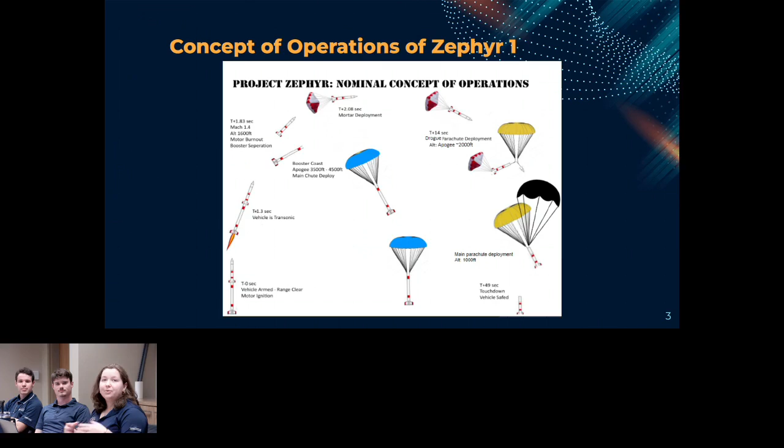But unfortunately, when we launched it, that's not how it went at first. As you know, things can go wrong sometimes in rockets, no matter how much we prepare. We did launch our rocket, and we got the booster back, and we got the experimental parachute back, but unfortunately, we lost the dart in the jungle of Florida. If you want to go to the next slide. We have a couple of views of the launches here that we want to show you guys.

We launched this single stage boosted dart configuration on an M3700 motor. Its top speed was about Mach 1.4, and then the parachute deployed at Mach 1.38, so it slowed down fairly quickly. We did not get the dart back, like I said, but the parachute detached throughout flight, so it did experience the forces. We just didn't get the dart stage back, which is what we're trying to improve upon on this next rocket.

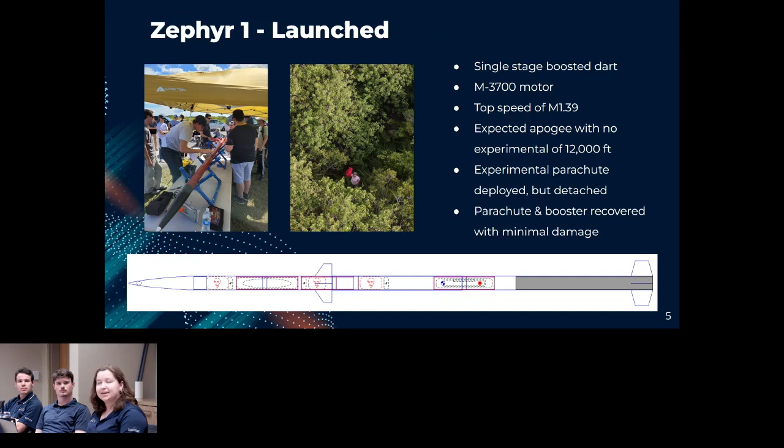And so we have Zephyr 2. Zephyr 1 was our first iteration. Zephyr 2 is our new launch vehicle that is more improved, more modular, more cost-effective for our testing reasons. So here's a rocket overview. There are 3 different parts to this rocket, 3 separate sections.

Going from the bottom to top, we have our first stage booster, which houses our largest motor and avionics and its own recovery system. Then the second stage booster, which has our secondary motor and avionics system and recovery system for itself. And then our dart stage, which has our data acquisition, additional flight computers that we need, and avionics bays, as well as the experimental parachute and the main and drogue chutes.

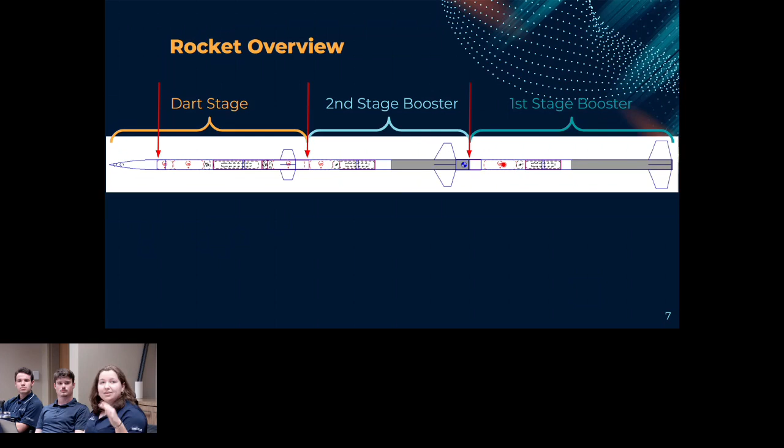So we'll kind of go through that. The dart stage, next. I kind of labeled it here a little bit. We're going to have 2 separate avionics bays in the dart stage. As you can see, there's going to be one in the nose cone. That was recently added because we're going to try live streaming video footage and data back to us by the launch field. And then we're going to have our drogue and main chutes. And we're going to have the dart avionics bay, which has our load cell in it, to make sure that we're measuring the load from the experimental parachute.

Our connection point, which our structural team will go more into detail on, basically anything to help with stage separation, so our black powder charges, and those are those red arrows right there, our separation points, and then we have the experimental chute in the back that has 2 cameras attached to it as well. Our second stage booster has its main chute and then the avionics bay that includes separation and ignition of the second stage motor.

And then we have what's called an exterior coupler for us. Since we are a minimum diameter rocket, it's a little bit difficult to stage our engines. So instead of having the extra frontal area drag, we are having the skinny rocket and then just having one external coupler to hold the top stage onto the second stage while it's being boosted. And manufacturing can go more into that in a little bit. And then our last stage is the first stage. There's just the main chute and the avionics bay, again, for separation and deployment of the parachute.

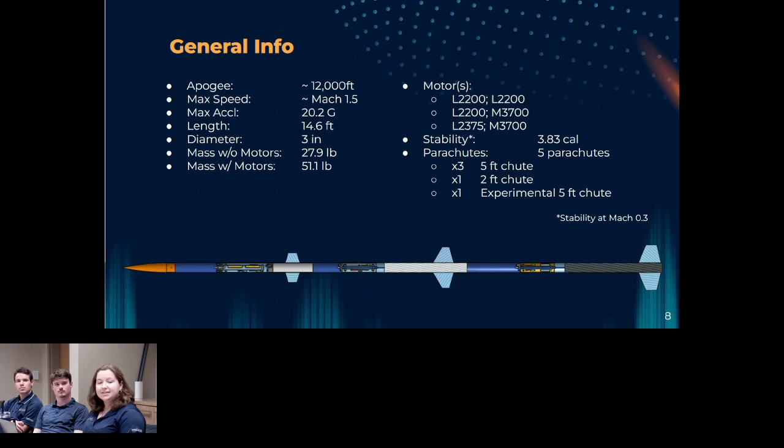So here's the concept of operations. You can just click through it a little bit. We have our launch in the beginning, and then we have our first stage separation from our first booster to our second booster, and then that first booster is going to recover, so parachute deployment. And then we have a second stage separation, which is about 4 or 5 seconds into the flight, so pretty quickly. We're getting supersonic pretty quickly. And that's the stage separation between the second booster and the dart stage.

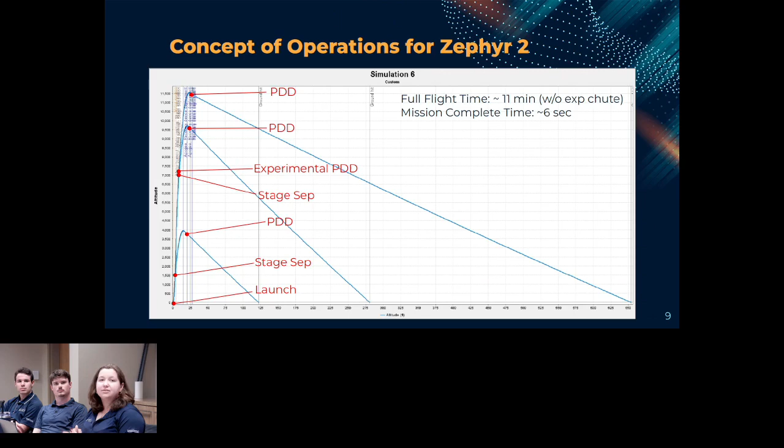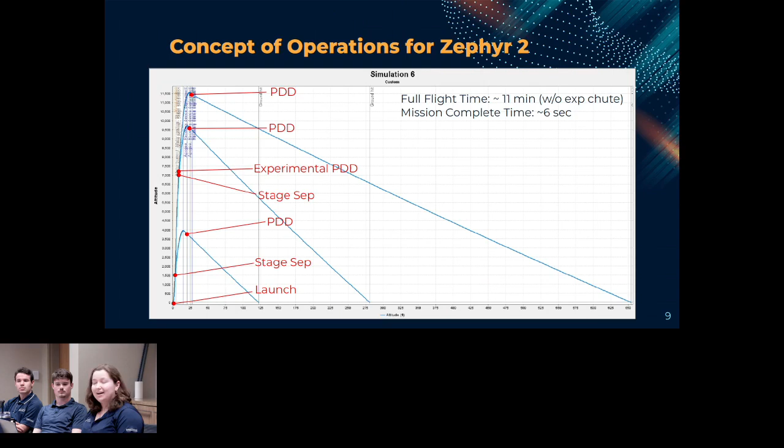And then the dart is going to deploy the experimental parachute, not even a full second after stage separation, just to make sure that the booster gets out of the way before we eject the parachute at the bottom. And then the second stage is going to deploy its parachutes and come down nicely. And then after apogee, if the experimental parachute does not work in any shape or form, then at an apogee of about 12,000 feet, the dart stage will deploy a drogue chute. So the full flight time with landing is about 11 minutes, but the whole mission is completed in about 6 seconds. So that's a pretty quick time frame that we have to deal with, especially avionics wise.

And so here are the recovery systems.

I know it's me talking a lot. I apologize. They'll get to talking soon.

We're gonna go into a large stairwell in our college, and we're gonna start dropping them, measuring the descent rates, which one works the best subsonically, and then we'll use that data to interpret what we're going to use for our supersonic test flight, and then we can add on to those as we get further.

So just a quick summary of the aerodynamic team's goals have been to obtain the trajectory versus time of our rocket, as well as the stability. We also want to make sure that our rocket doesn't exceed the altitude limit at our launch site. It's also very important. Previously, we would use OpenRocket for our whole simulation, but OpenRocket's accuracy begins to suffer in the transonic and supersonic regions.

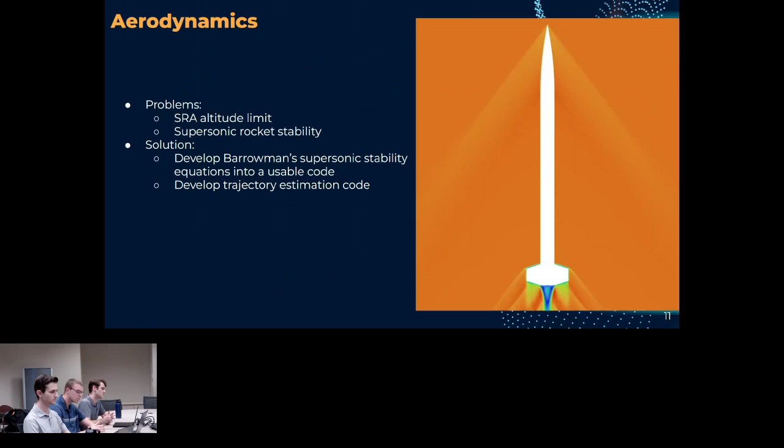So we are trying to develop our own codes for our own purposes to obtain these quantities. So we're developing Barrowman's supersonic stability equations from his paper into a usable code, and we're also developing a trajectory estimation code. So just a quick overview of the trajectory estimation code. So it's based off of the rocket equation. It's a statement of Newton's second law, right? It sums the forces on the rocket.

The code determines the velocity contributions from each force. So obviously thrust is a positive contribution, gravity is a negative, and drag is also a negative. In this case, we're assuming zero angle of attack, so there's no lift. But through each iteration, it builds off the last, and eventually what you get is a smooth curve of velocity. And you can integrate velocity to get your altitude, and you can take the derivative to get your acceleration. And in the end, we get a very good approximation of velocity, position, and acceleration versus time.

There are some drawbacks. We're relying on previously existing data. We're using engine thrust and engine mass flow rate data from the manufacturer, which is tabulated, so it's not exact, it's just an approximation. We're also using the ISA atmosphere model, which is accurate within our flight envelope. Additionally, we have to determine drag on our rocket.

And this is a difficult value because typically this would be determined experimentally with wind tunnel tests. But we don't have the funds for that, so we are looking into other methods, such as empirical methods from many years of missile tests and missile experimental tests in wind tunnels. And we're also looking into doing some CFD simulations to determine the drag.

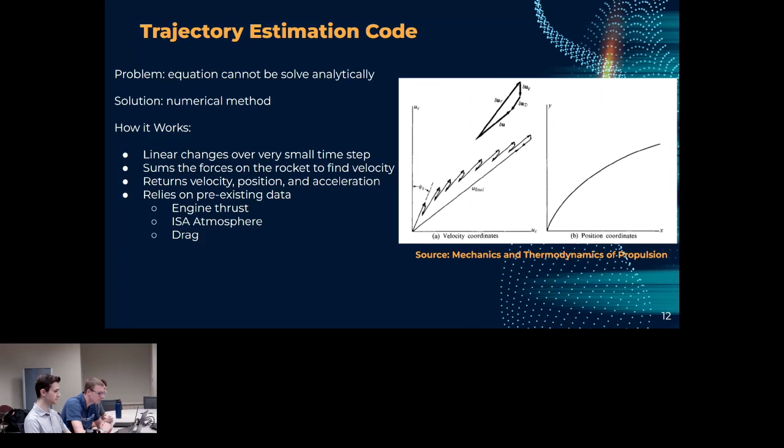So as Eric stated, we need the drag coefficient values for our trajectory code. So that's what this whole section is about. We need it for the trajectory. And also we're trying to get these coefficient of drag values to match up between different models that we use. So when we start going into CFD, if we get coefficient of drag values outputted from CFD, we want to check it with something else. So the more we check, the more we can trust that value.

So the model that we use is based off of AIAA's education series, Missile Design and System Engineering by Fleeman. And in that model, there were a few assumptions. The first of which is that there is no boat tail, and the boat tail is placed at the end of the rocket, which reduces the pressure drag, and it basically controls the wake, minimizes the wake effects on the drag. And in this model, it's called the base drag.

Another assumption is that there was a gradual change in the speed of sound and viscosity in the altitude that we're going to be dealing with. That's true. And then also it assumes that there's a turbulent boundary layer, and because we're going at Mach speeds, we will definitely be having a turbulent boundary layer.

So the coefficient of drag model does have some limitations. The first of which is that it assumes a linear aerodynamic model. What this means is it essentially adds up the coefficient of drag for the various rocket components. So for example, it computes the coefficient of drag for the body, and then it computes the coefficient of drag for the sets of fins, and it simply adds up those values to get the total drag.

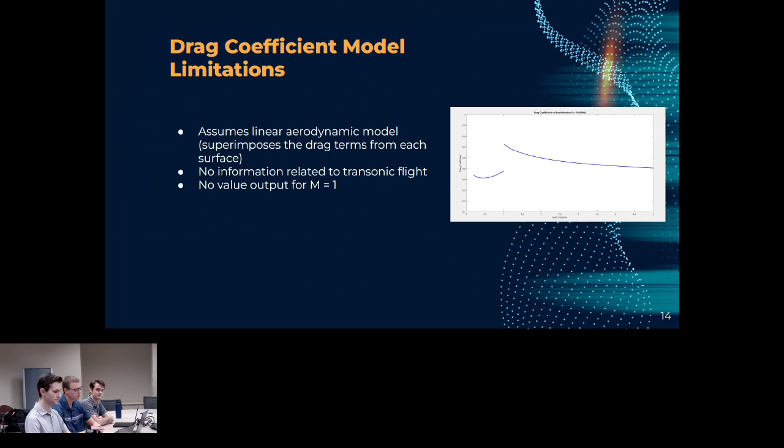So what this means is that it won't account for the fin interferences between the different sets of fins. And for our rocket, we have multiple sets of fins, so that might be something to keep in mind as we move along in our analysis. Also, there's no information directly related to the transonic flight regime, and there's also no output for Mach equals 1, which when you look at this figure to the right, you see a discontinuity, which is expected for this model. Next slide.

If it doesn't work, then we'll go back and look at the specifics of our code, make sure the assumptions are correct, or maybe add some more details if some of the assumptions cannot be made. And then we'll keep checking and keep checking until it works. When it does match, we'll then start applying it to our Zephyr 2 rocket. And then from that point, we'll be able to check the requirements such as altitude to make sure that we meet those requirements.

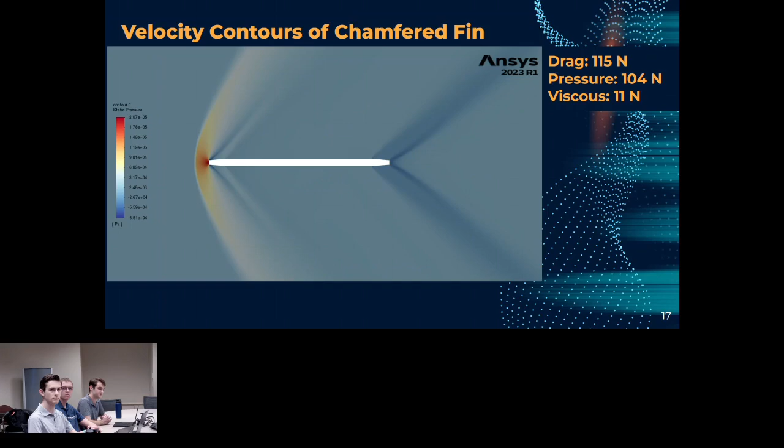Yeah, so what you see here is the first CFD simulation that we performed that we actually used to influence the design of the rocket. So right here is a static pressure contour plot of a simulation of one of the fins from the dart stage. This is the chamfered configuration, and this was run at Mach 1.4. The purpose of this simulation was to compare the drag result from a chamfered fin versus an unchamfered fin, because chamfering fins, especially composite fins, can be quite difficult to get a consistent angle. So we wanted to make sure that if we were going to put in the effort to do that, we'd get a significant result. So as you can see here, this fin produced a total drag, including pressure and skin friction, of 115 newtons.

Next slide. Immediately, you should be able to see the change in the flow structure because we're using the same contour colors. You can see the bow shock at the front moved away from the fin, and it's also at a steeper angle. It indicates the flow is having to slow down faster, and there's a higher pressure at the front. And as you can see on the right side, the drag is about 50% more, which is quite significant. So I bet you can expect which fin configuration we used.

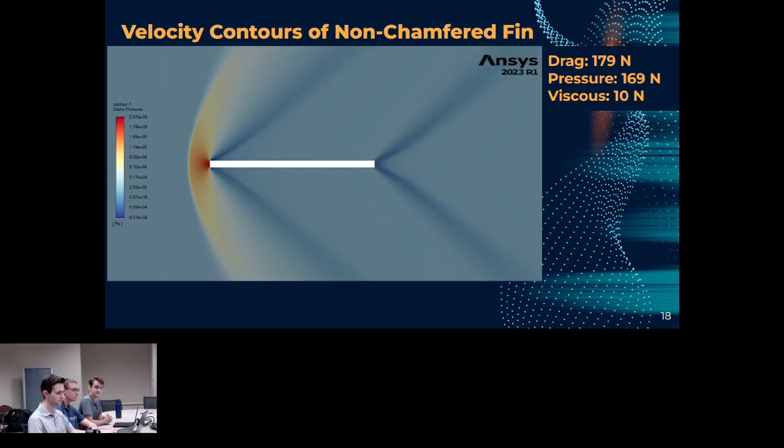Those simulations are not validated yet. We don't exactly know how to do that, but we're learning. That's one of the main goals of the CFD team, is to learn how to use CFD correctly as an aerodynamic analysis tool. We want to make sure that we validate our simulation methods. We want to make sure we're able to verify our results. And we also, in the future, want to be able to determine the error, so we can figure out possibly when we plot our trajectory what the upper and lower bounds of our maximum height, velocity, and acceleration might be.

Once we figured out how to verify and validate our solutions, some of the goals which we would like to accomplish are validating the empirical model, which Spencer talked about, validating the center of pressure data, which Graham will talk about for the stability calculations, and to fill in the data in the transonic region where the empirical model doesn't

provide any results. Currently, the software that we're using for our preprocessor, you can think of that as kind of like CAD, but for CFD. You build a computational domain, which allows you to simulate the flow around the body. The software that we're using for that is ANSA by Beta CAE Systems, our sponsor, and Fluent's preprocessor, as well as Pointwise. We have a bunch of different people on the team with a bunch of different skill sets. Some people prefer some softwares over others.

For our solver, we're using SU2. It's an open source CFD solver, and we're also using ANSYS Fluent. For our post processor, we'll be using Meta, again, by Beta CAE Systems. And lastly, we're still trying to figure out how we're going to run these simulations. The 2 fin simulations I showed you were run on my laptop. It got very hot. There weren't that many cells. It was only about 40,000 to 80,000 cells, which is not a lot. There was a simulation that I ran over the summer on a supercomputer that had about 4 million cells, and that took about an hour still.

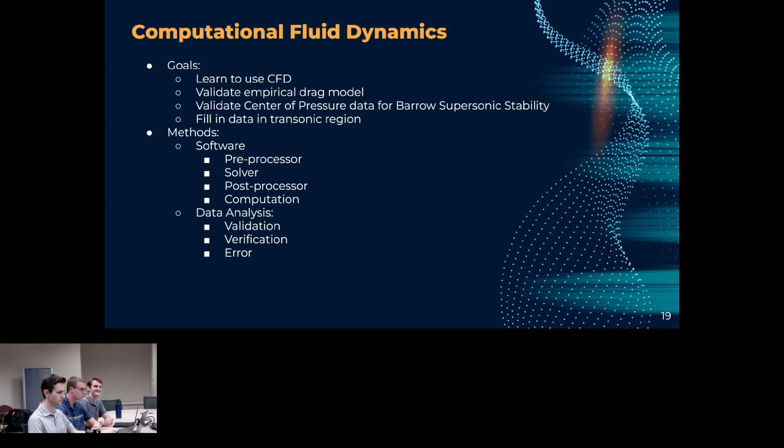So this is the future vision for the aerodynamics team. We want to make sure that we have all the aerodynamic parameters, such as the drag coefficient and normal coefficient. And we also want to establish a credible trajectory code, and how we were going to do that was referenced a few slides back, which was that iterative evaluation. We keep checking it and rechecking it, and then that loop. And we'll keep revisiting these points as we do flight tests and get flight data and check out the flight data.

And for the farther along goals, we want to optimize the Zephyr 2 geometry where we can, like changing the nose cone geometry, or adding boat tails, or doing some adjustments to the fins. And also we want to look into two-way FSI for parachute behavior, that being the fluid structure interaction. And this will give us more accurate CFD results, because instead of a static mesh, we'll start taking into consideration the dynamic effects that mesh has.

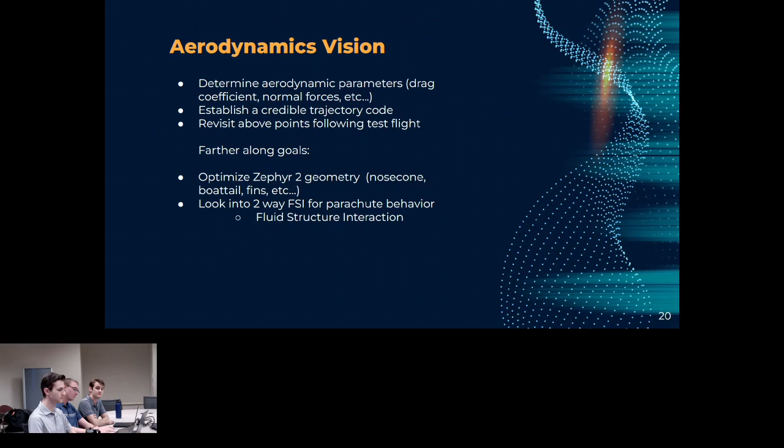So, supersonic stability. This has been a year-long attempt at recreating James Barrowman's supersonic code from his thesis paper back in the 60s. We have successfully been able to validate the results with what he got in his paper for a tomahawk fin. The only caveat now being that for calculating things for the entire rocket, it uses subsonic calculations for the nose cone and interference factors, simply for the sake of ease. And we will be adding those in later on, hopefully sometime this week.

And as you can see on the bottom there, I have up the stability for the full rocket as a function of Mach number, and as a function of Mach number and angle of attack. And as you can see, we very, very briefly are going to become unstable, but in terms of the actual rocket's flight, that will be a very brief period, if there at all.

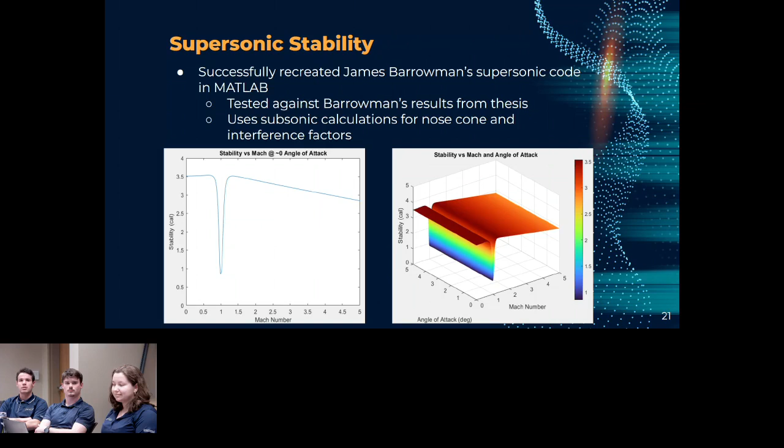And here are just some more graphs showing what it would be like for different stages of the rockets together. We have the full rocket, which was on the previous slide, and then with the sustainer stage and just the second booster, and then the sustainer only. And as you can see, that little dip is the only time that our rocket will ever be unstable.

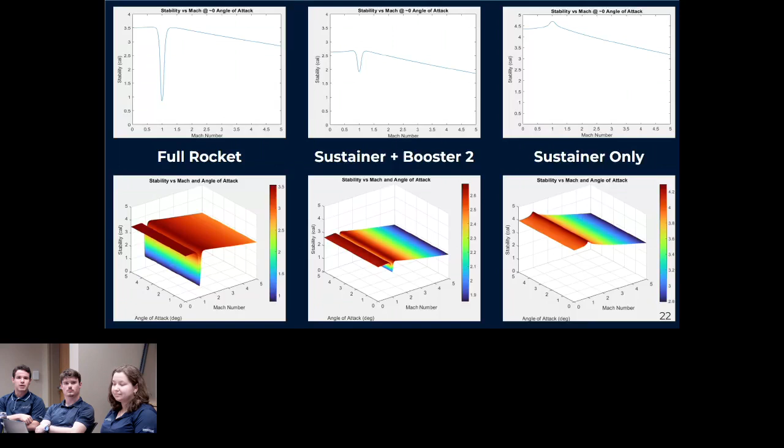And for the future of supersonic stability, we will be looking at developing a stability versus time graph for our trajectory based off of the trajectory code that we are making. We will also be applying it to our code for aeroelastic divergence, which I'll go over in the next slide. And we're going to incorporate those supersonic nose cone and interference factor calculations.

So for aeroelastic divergence, he's not here with us right now, but one of our members has developed code to determine our fin flutter. He did it based off of a model given by an Apogee newsletter, and confirmed them with AeroFinSim 10.

On the bottom there, you can see the table of values for our flutter speeds, both hand calculated and calculated through AeroFinSim. And as you can see, the calculations by hand were pretty accurate for the boosters, but for the dart stage, not so much. So we'll be going with our AeroFinSim results, as we find them to be more accurate.

And you'll also notice that the speeds at which we'll experience fin flutter are going to be higher than what we would normally experience during flight, which is very good because we're not going to be having fins breaking off during flight. And then we will also be developing a version of Chris Flanagan's FlexROC, which will use supersonic calculations and will help us determine whether or not the rocket will snap in half during flight, which would be, to put it lightly, very bad.

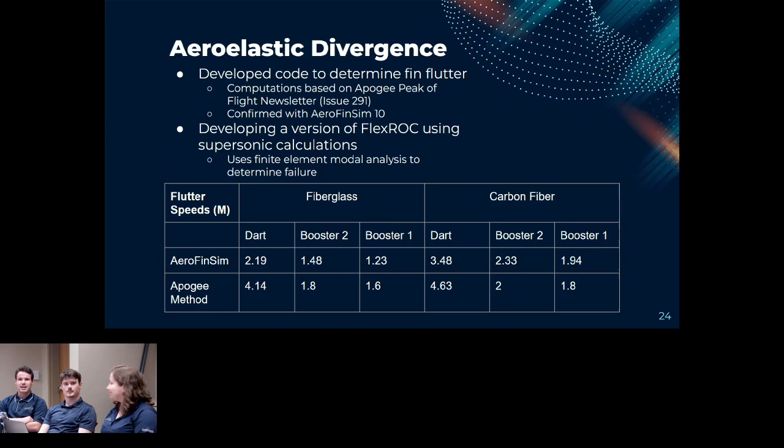Okay, so now we're going to talk about structures. So as you've seen, we're going to be ejecting a parachute at a very high speed. And so one of the main goals of the structures team is to make sure that the rocket doesn't fall apart when that happens. And so we actually calculated that we would be seeing up to a 5,000-pound peak load on the rocket when the parachute deploys, which is a lot.

And so just to give a little bit of context, that image you see in the upper right, that's the area where the experimental parachute is attached, so that red box there to the back of the dart stage. And below that is a cross-section from our CAD of the system that will be retaining the parachute when it deploys. So we took what seems to be a little bit of an unconventional approach when making this. You may notice there's no U-bolts or I-bolts or even a threaded rod through the avionics bay, and I'll explain why we took that approach.

But the way it works is that the shock cord is actually looped through those two big holes in the bulkhead, so it's tied directly to the bulkhead. And the bulkhead is disconnected from the avionics bay itself. That's why there's no threaded rod. And the real reason we decided to do this was because just in case something did go wrong, we wanted to make sure that the avionics bay would still be okay. It contains all of our flight data, our footage. So if something did go wrong, the two systems are sort of disconnected. So that fits with our theme of safe and reliable systems. Of course, though, we don't want things to fail.

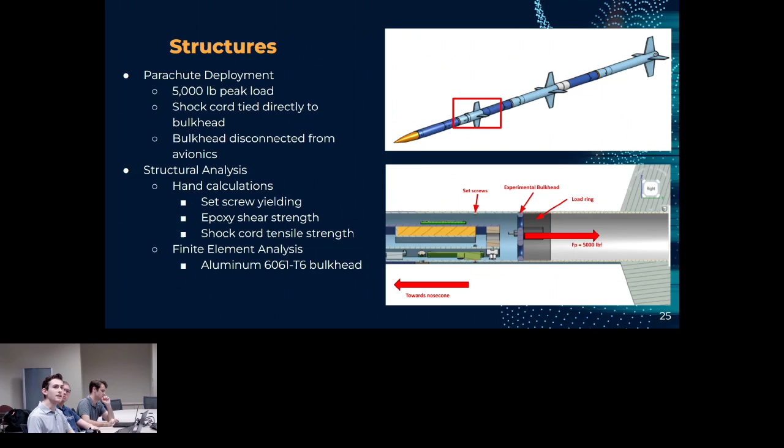So that's a picture of the bulkhead. It kind of looks like a very thick slice of Swiss cheese, but there's a good reason why there are so many holes in there. It's a very complex structure because there's a lot of functionality associated with this. There's going to be charge wells on it to eject the parachute. There's going to be a hole for a camera. There's going to be the two big holes you see there. That's where the shock cord is going to be looped through.

And so to simulate this, we assumed a 5,000-pound static load. So that's not entirely true, right? In reality, it's only a transient peak load, but we figured that if we tested it and designed it to withstand a 5,000-pound peak static load, it would be okay. It's a conservative estimate. And so that red area you see in the top left image, that's where we decided to apply the load in our simulation. It simulates where the shock cord will be pressing against the bulkhead. As I explained before, it's going to be looped through as opposed to tied to an I-bolt or a U-bolt.

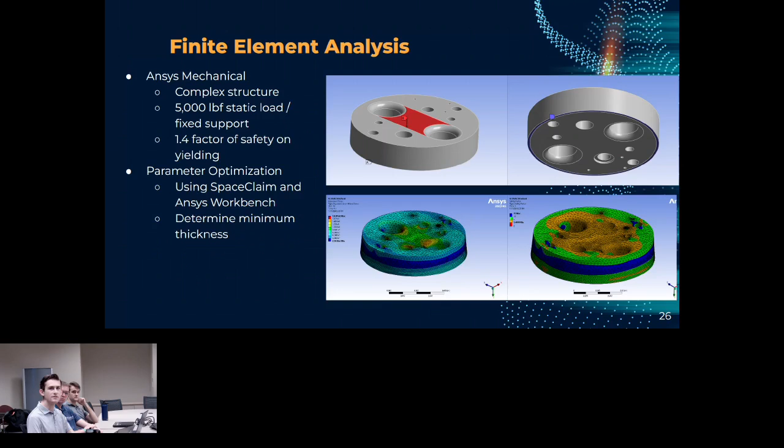And below those two images, you can see the actual results. So we designed it for a 1.4 factor of safety for yielding. And all of this was done in ANSYS Mechanical. And the actual design optimization was done using ANSYS Workbench. So the thing we have control over, really, not the holes, those have to be there, is the thickness. And so we used the parameter optimization in ANSYS Workbench to determine the minimum required thickness for the bulkhead, which I think was around 12 millimeters. So that's why it's so thick, so that it can withstand the load.

Of course, analysis is great, but it's also good to validate that analysis with testing. And so we plan on doing a full structural test of this compactified model. So you can see in that bottom image is basically what's in that top image, except it's shortened. All the same key parameters are kept, like the size of the load ring and bulkhead, number of set screws.

It's shorter though, because it's going to be clamped on both ends. And it's actually going to be tested up to 5,000 pounds in the Embry-Riddle Structures and Instrumentation Lab. So we plan on doing an actual test, and this will really help us validate our design and our analysis, and we hope to learn a lot from it.

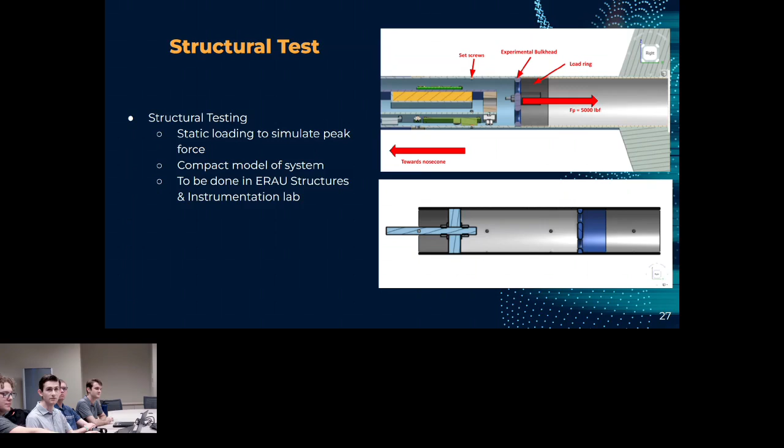So for manufacturing, our sub-team is responsible for the physical construction of the structural components of the rocket and the stability components of the rocket. We get to work with hand tools and power tools in the composites laboratory because a lot of the materials that we use are composites. I actually have some physical visual aids that I hope you guys can see.

This is one of our body tubes that we talked about earlier. It's 3 inches in diameter. It's made of fiberglass. We order the fiberglass and it comes in longer tubes, and then we cut them down to size and sand them. This is part of our stage 2 booster. It's one of 2 body tubes in that stage.

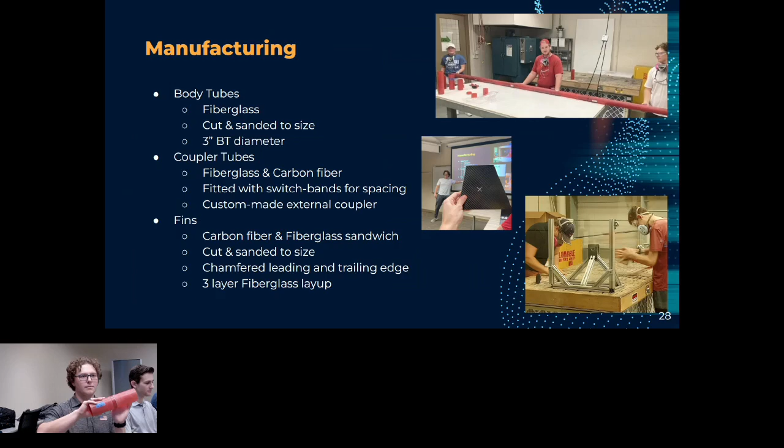Here, made of the same material, I have a cut and sanded coupler tube, which is a smaller diameter that actually fits inside the body tubes. It also has on it a switch band, which is the same diameter as the body tubes, that's epoxied in place. So when I slide it in like this, it stays like that and allows us to put another body tube on top, and it contains an avionics bay inside of this coupler tube eventually. Not right now, obviously.

As Rebecca mentioned earlier, we have one coupler tube on the rocket that is a larger diameter than our body tubes. This was actually not ordered, it was made in-house with the cooperation of another part of our club, EarthSEDS, our project ACME. It's made of carbon fiber and it's completely untouched. That's why it's bunched up at the ends. This is just the raw product. We haven't cut or sanded it at all.

Right here, I have one of our fins for the rocket. It's made of a carbon fiber laminate plate. This is for the first stage booster, which is the largest set of fins we have, with a lighter background so you guys can see it. All 3 boosters have different size fins with different sweep angles, different trailing edge angles.

And currently what manufacturing is working on is a solution to making a chamfered fin. So chamfered leading edges and chamfered trailing edges for better airflow over the fins at all stages of the rocket. And this, I just grabbed before the presentation because I almost forgot it. This is a fin jig. What we use this for is how we mount the fins to the rocket.

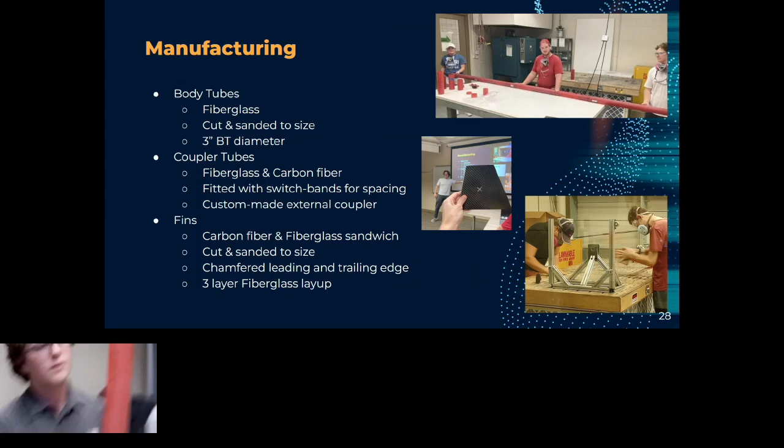Is that good? Yeah. While we're epoxying the fin to the body tube, and then once that's dried, we remove the fin jig, and then for this rocket we are going to put 3 layers of fiberglass on top of the fin to make sure that they don't fall off the rocket, make sure they're secure in place.

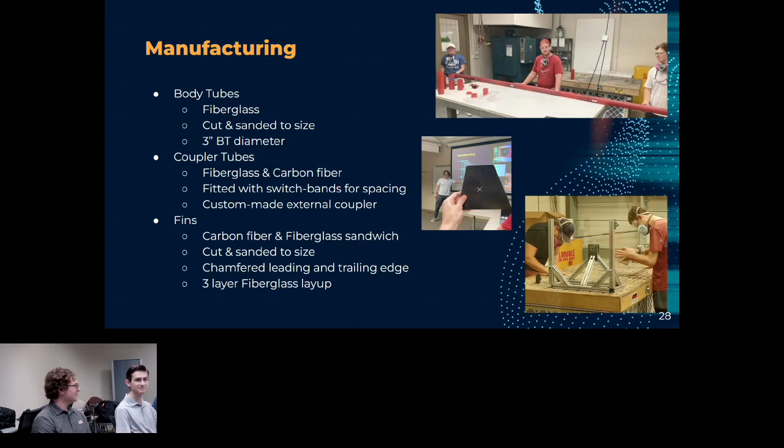Okay, so as Rebecca mentioned in the beginning, we have 4 avionics bays in Zephyr. One is in our first booster, one is in our second booster, and then we have 2 in our dart stage. All of our avionics are controlling our stage separations, our parachute deployments, motor ignition, and also our data acquisition. So for the dart, we have 2 avionics bays. One is just for data acquisition, and then we have our main bay that is actually controlling everything.

In our main bay, we have 2 flight computers, a Blue Raven and a Telemega, and those will be collecting data and controlling all of our parachute deployments and separation charges. For data acquisition in this avionics bay, we have a Raspberry Pi, and then a Raspberry Pi camera as well, and that is going to be watching our experimental parachute, so we'll be able to view it later. We also have a load cell in this avionics bay, so we can collect data from our parachute being deployed. And we're going to be using LoRa modules to send that data back down to us so we can watch it live during the launch.

And then we have a second avionics bay in the dart stage, our data acquisition bay, which will have another camera pointing down from our nose cone. And we are looking into using that to stream so we can get a good view of our rocket from the ground.

For our second stage, it's going to be controlling our motor ignition. And we have 2 flight computers in it, a Telemega and an Aim-Xtra. We're using these 2 because they have gyro modules on them, so that way our rocket won't ignite if something goes wrong and our rocket's horizontal. And then our first stage avionics, we also have 2 flight computers, a Blue Raven and a Telemega. And like our dart stage, those are just collecting data and then performing our separation charges and parachute deployments.

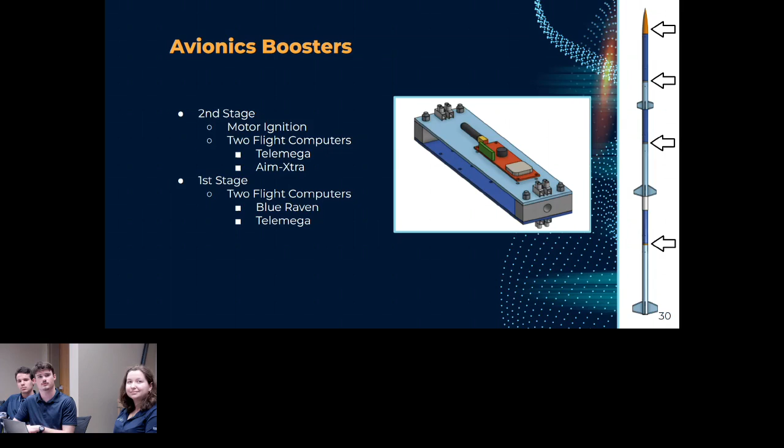So overall, we have done a lot of work, our whole team. However, we have a lot more work to do and some things that we want to do in the future. So 3 particular things we want to do in the future: first, once we have a successful flight, either this next upcoming month or March, we want to make a more dynamic, flexible to rigid system for our recovery system. So basically start off with a parachute that's packed extremely small, resembles more like a fabric type of thing, and then it can expand into a stiff structure once it's being deployed, basically forcing the parachute into an open configuration, making the deployment more reliable for the recovery system.

And then the second thing we are looking into currently is with our other EarthSEDS project, ACME, our manufacturing sister project. We are working on seeing what kinds of cheaper materials we can use and how we can manufacture our rockets more efficiently. And the third thing kind of falls under materials as well, but also the design of the rocket and the packing techniques used for the parachute, is how easy it is to use and maintain. So really developing the packing techniques.

I did a presentation last R&D NARAM on different packing techniques we used for the first Zephyr rocket, but now we're trying to make those a little better, make sure that there's not a lot of friction going on and melting our parachute. And then adding more of the low maintenance. It doesn't need as much time to check over before each launch, so we can launch a lot more and test a lot more, basically so we can have more materials and cheaper and lighter materials so we can get to different higher speeds as well.

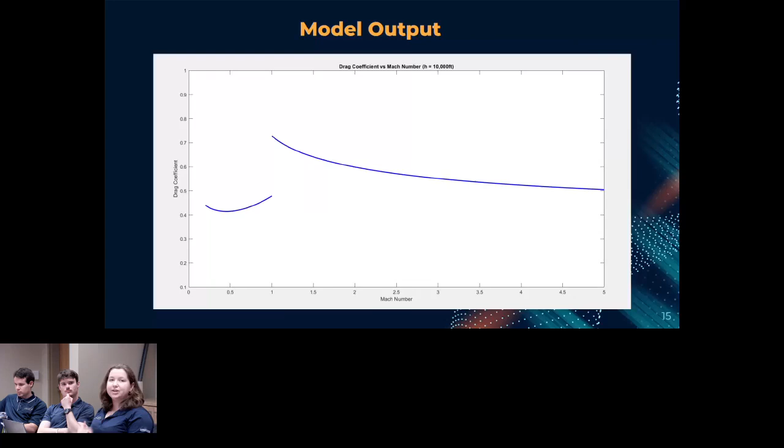So we have a lot of different members. Currently, we have over 30 undergraduate members. I would say our last meeting had 25 and not everyone was there. So at least 27 active Zephyr members. I've counted over 30 at many different meetings, and it is consistently rising. We recently had 4 or 5 new members join for freshmen this past meeting.

And we'll see what happens if they come back or not. But we started with 6 people originally a couple of years ago. And then we just grew that, and we're now a big, happy Zephyr family, doing CFD work and MATLAB and coding and supersonics in general. So we have a really big team, but everyone's doing something, whether it's PR, technology, manufacturing, actual calculations. Everyone's involved in that. Okay, another one from Bob Zurich.